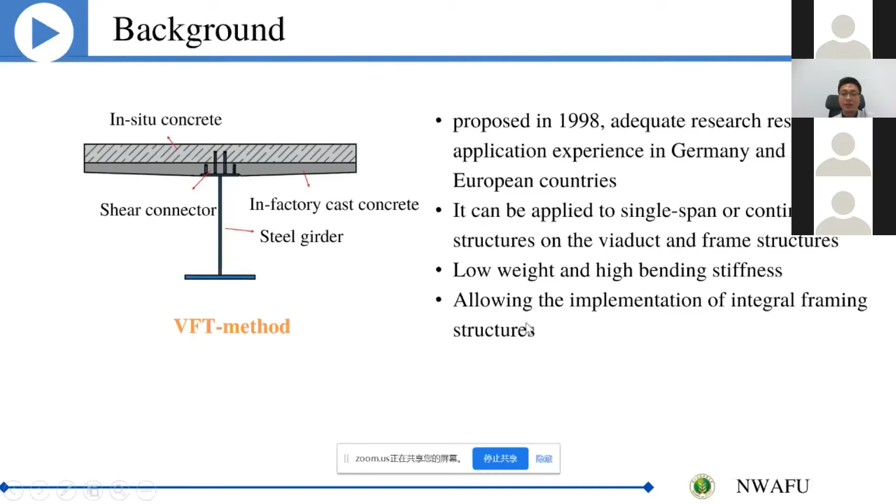Okay, so what we want to present today is the MVFT girder. The M denotes modified. Its origination comes from this: I was a senior engineer in the key laboratory of our bridge construction, and we were going to build a highway bridge in a cold, high altitude permafrost region. The following three pictures demonstrate how devastating the environment is.

As you can see, on the Tibetan and Qinghai plateau the environment is very harsh and very cold, and it's a high altitude plateau. Normally people get less oxygen, feel dizzy, and don't feel well in that environment. The middle picture is me, in a survey of bridge maintenance. The third picture is a highway bridge that suffers settlement because of the permafrost effect.

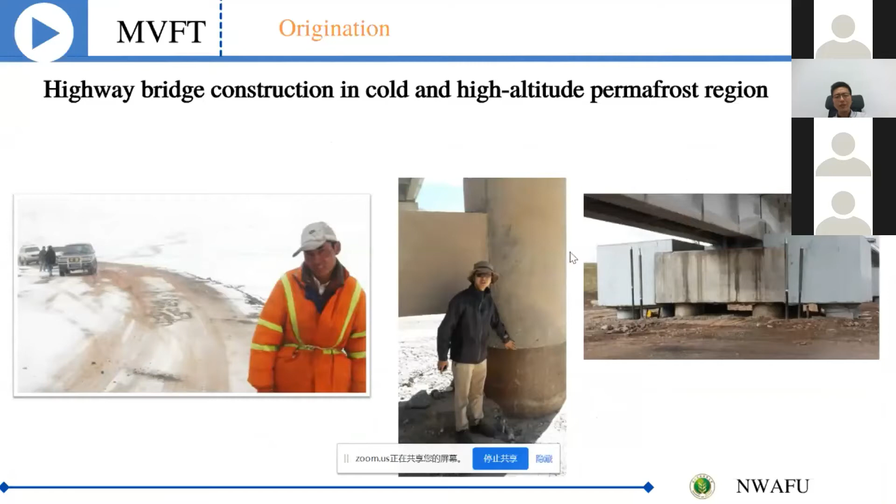You can imagine if you design or make a construction in such a harsh environment, that's a very tough task if you pour a lot of concrete and make a lot of welds. So we came up with a solution: this prefabricated integral bridge, which is more suitable for small span bridges. That is what our solution is.

We changed this VFT girder into a whole concrete slab, which means we made all these girders in the factory. Also, when it comes to a 40 meter span, we make the girder concrete filled with a hollow section. So it has some characteristics, like overall prefabrication without secondary pouring. That means we don't need so many laborers in the high altitude and cold environment.

Beams are connected by transverse wet joints, and the variable height of precast concrete reduces the dead weight, which is a very important factor in this scenario, since the bridge construction site in the Qinghai Tibetan Plateau also has a lot of major seismic events. When we reduce the dead weight, we can reduce risks.

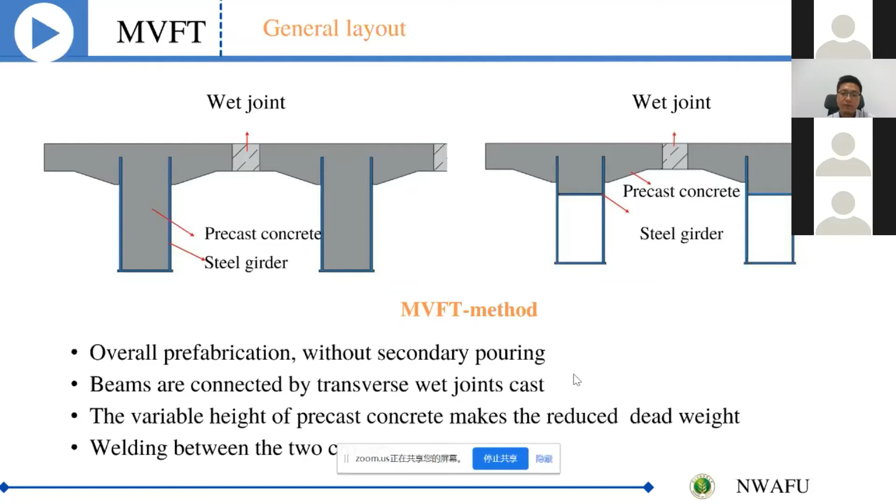We came up with the steel part of the MVFT beam, and this is the shear connector geometry. We made a lot of analysis of this connector, and we changed the radius of the comb plate. It was found that the maximum tensile stress and stress concentration coefficient at the comb under horizontal load increased and then decreased. The maximum tensile stress and SCF at the comb teeth under pull-out load continued.

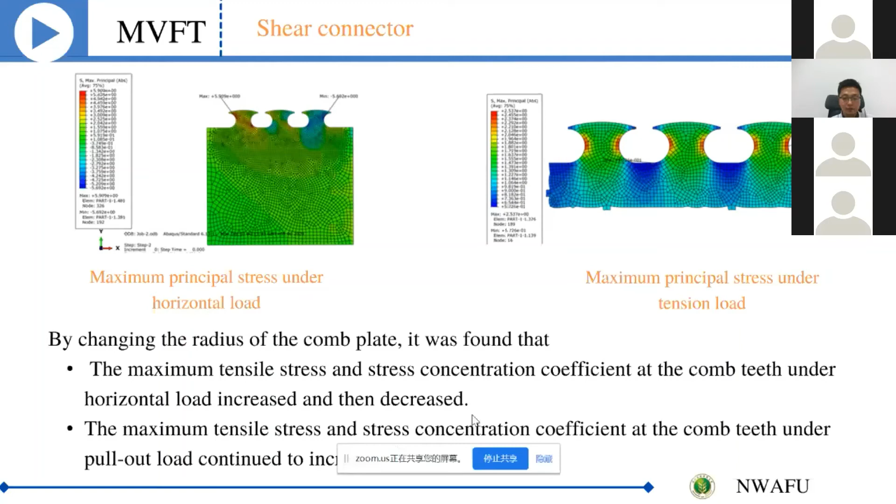This is the construction method we propose. The main difference from the traditional composite bridge is that, as you can see, we made a temporary bracket or brace here. As my mouse moves, every girder was standardized, and when we erect here and here, it supports them. This is girder A, this is girder B, and girder A and girder B were connected with in situ concrete or welds.

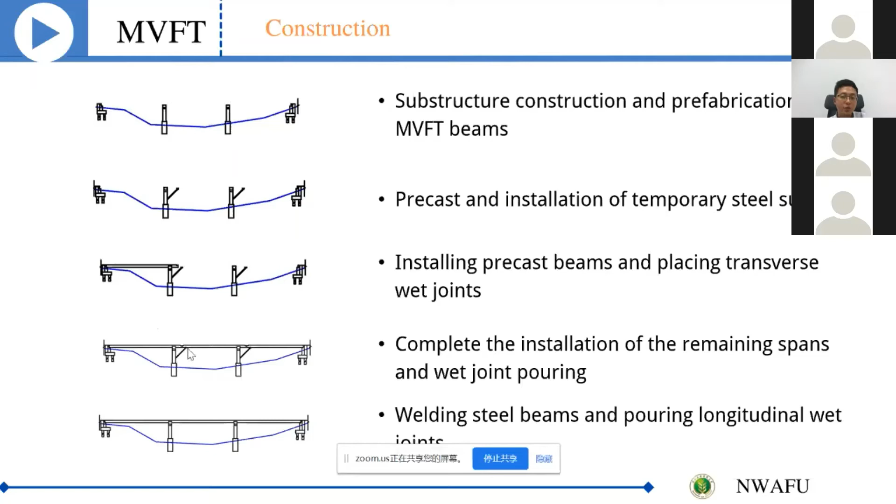Let's take a continuous bridge of 3 by 40 meters as an example. It has a width of 19.8 meters, a steel girder web height of 1.23 meters, and a total of 9 girders. As you can see, the maximum stress was only 213 megapascals, and the displacement was 0.16 meters.

Under the normal use limit state, the displacement was 0.099. The assembled prefabricated MVFT steel hybrid composite bridge structure meets the code requirements of China and shows great structural performance.

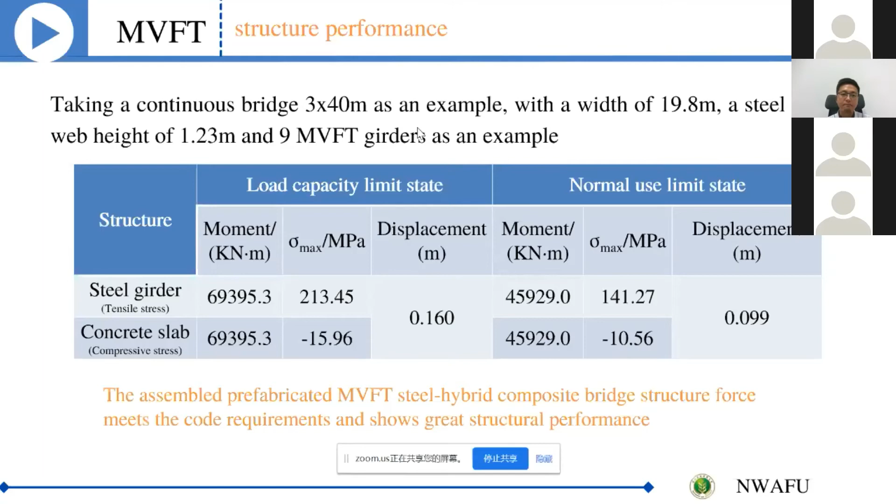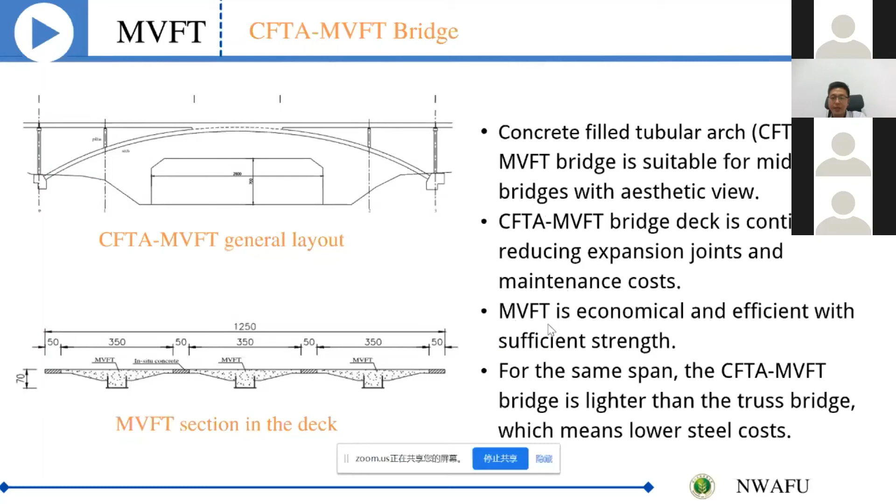Here we also made a concrete filled tubular arch pilot design using MVFT. As you can see, it is suitable for mid-span bridges with an aesthetic view. The bridge deck is continuous, reducing expansion joints and maintenance costs. MVFT is economical and efficient with sufficient strength. For the same span, the CFTA MVFT bridge is lighter than the truss bridge, which means lower steel costs.

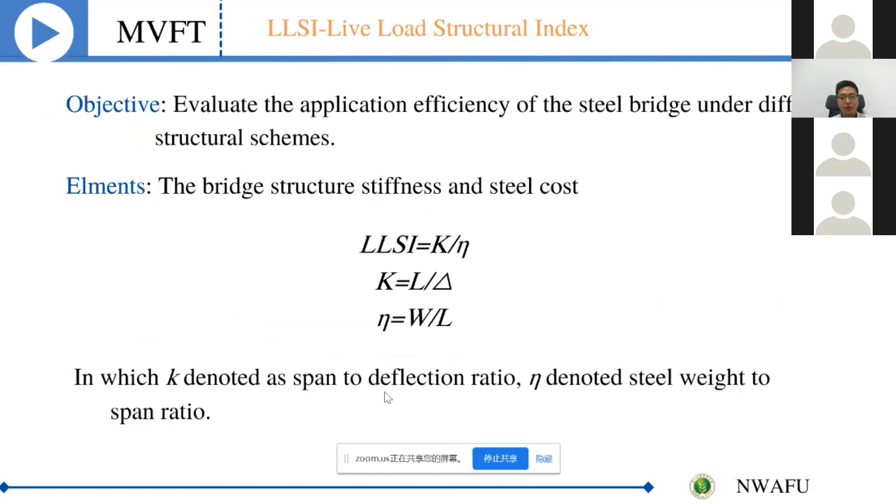Also, we propose an index we call the live load structural index. The objective is to evaluate the application efficiency of the steel bridge under different structural schemes. We define it this way: LLSI equals K divided by eta, in which K denotes the span to deflection ratio, and eta denotes the steel weight to span ratio.

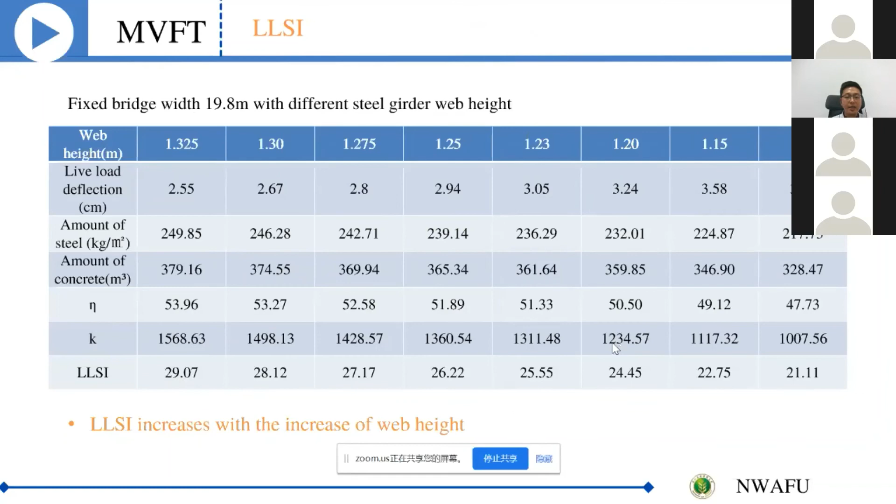This table shows the LLSI index distribution when the web height is reduced from 1.3 meters to 1.1 meters. As you can see, LLSI decreased from 29 to 21, which means the LLSI increases with the increase of web height.

Here's a generalization of the advantages of MVFT: it can ensure the quality of the girder, lower economic costs and lighter weight, fast construction speed and shortened construction period, which, as we have emphasized, is very important at cold and high altitude bridge construction sites, and better operating conditions and lower post maintenance costs.

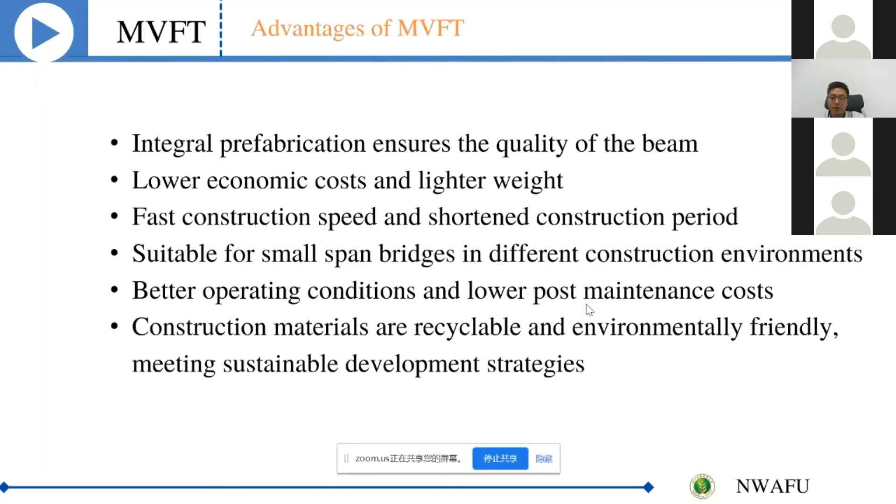Okay, lastly, if some professors or scholars are interested in our work, you can search the website using the DOI. We have published 2 papers: concrete filled tubular arch modified VFT bridge and its LLSI analysis, and the other is structural analysis of prefabricated steel concrete composite bridge applied in cold and high altitude permafrost region.

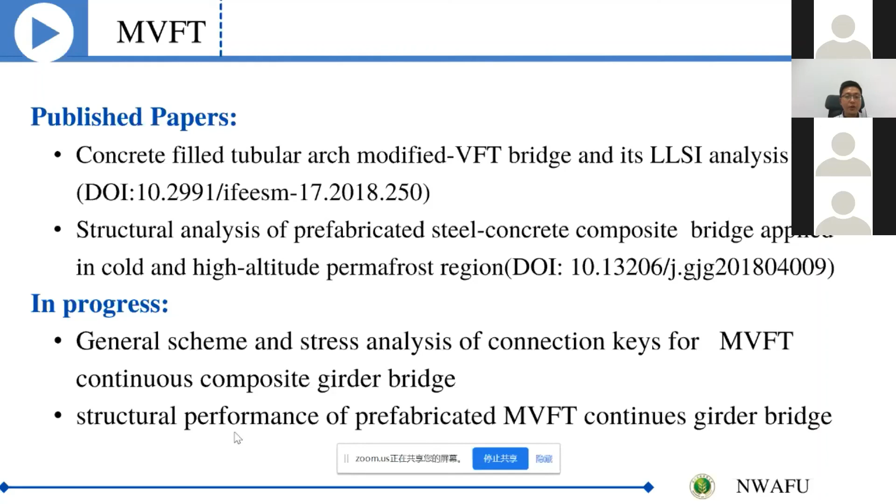What's more, our research is in progress, and we mainly focus on the general scheme and stress analysis of connection keys for MVFT and continuous composite bridges. We're writing a paper right now and it's almost finished. The other is structural performance of prefabricated MVFT continuous girder bridge.